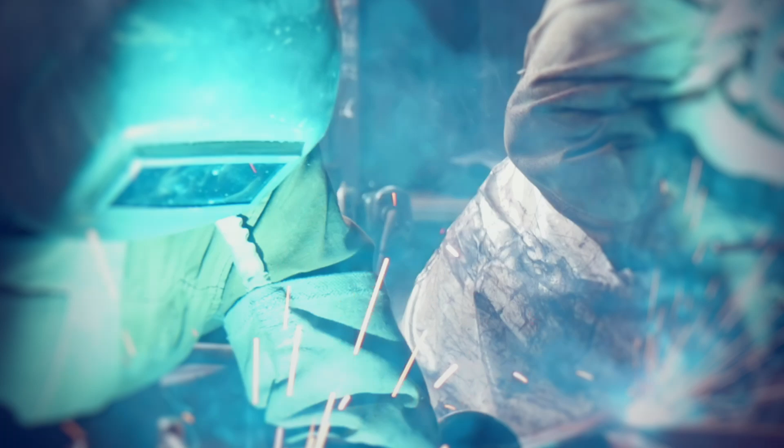Welcome to Trading Up Special Edition, where we give you an inside look at job opportunities and the possibility to trade up your lifestyle. Probably one of the toughest decisions we make is what career path to follow, whether fresh out of high school or already in a career that isn't quite what you expected, or perhaps facing a job loss. What are your options?

You could just immediately enter the workforce. Many today are hiring with no experience necessary. Maybe a 4 or more year college degree is your path to a chosen profession.

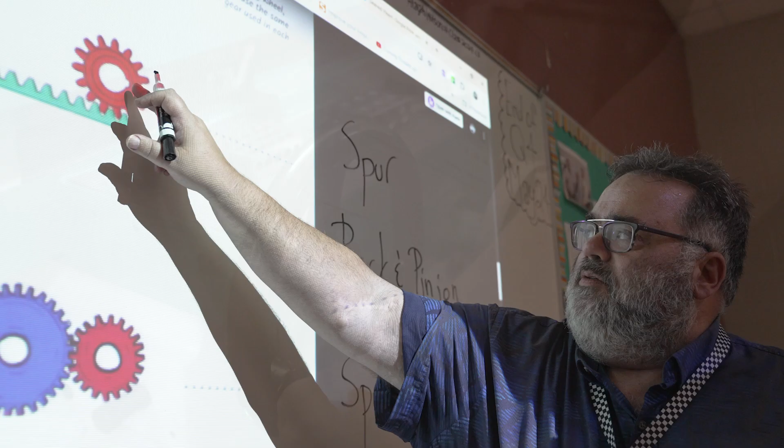Or yet, another option is to get trained by and learn from the best at Toledo Public Schools Career Tech, a place where you can unlock your future. You won't just settle for an average run-of-the-mill job. You'll be preparing for a great and rewarding career.

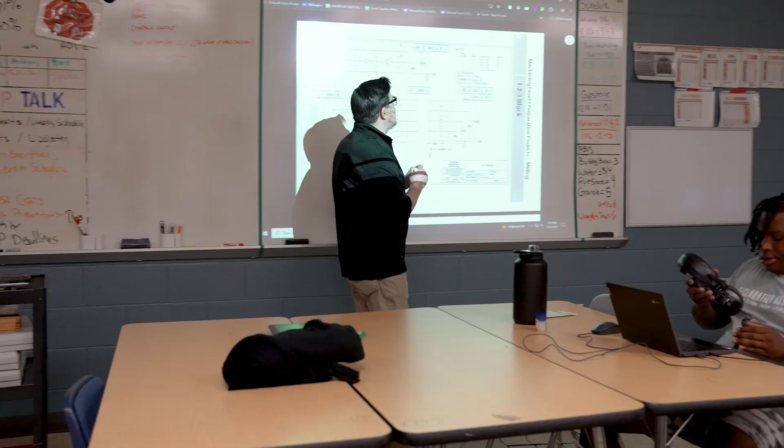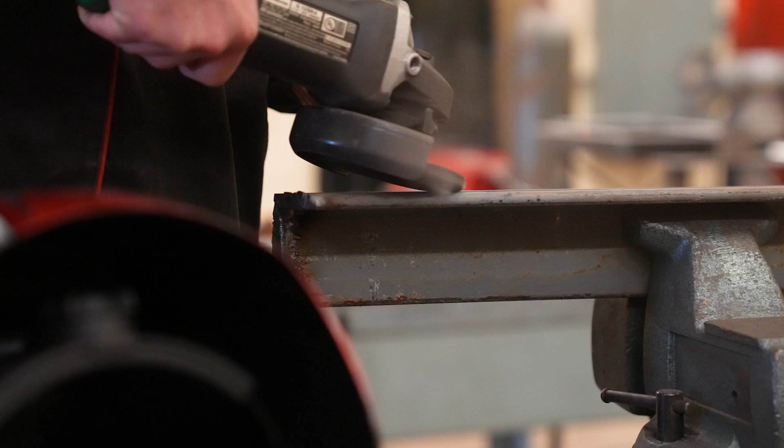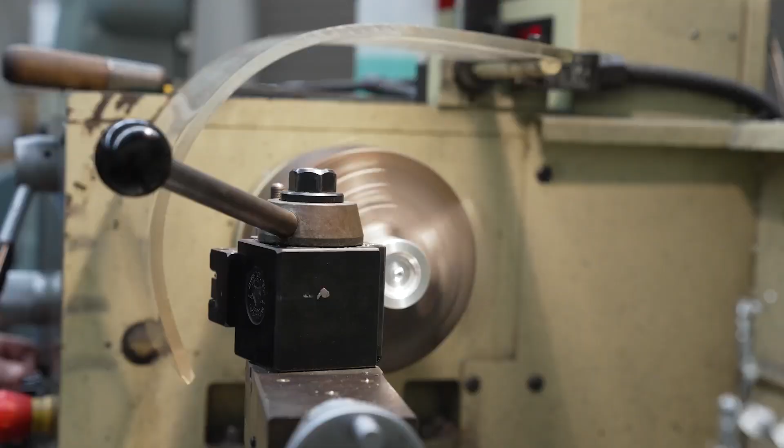Fantastic instructors provide both expert instruction in the classroom and comprehensive hands-on activities in the shop, training you for your career of choice. On this episode of Trading Up Special Edition, we're heading to Toledo Public Schools Career Tech to learn more about the classes in their manufacturing program. We'll meet several instructors and students at Toledo Public Schools to hear their opinions on the program and what opportunities those classes provide. Offering both advanced manufacturing at multiple locations and welding, Toledo Public Schools has a career path for you.

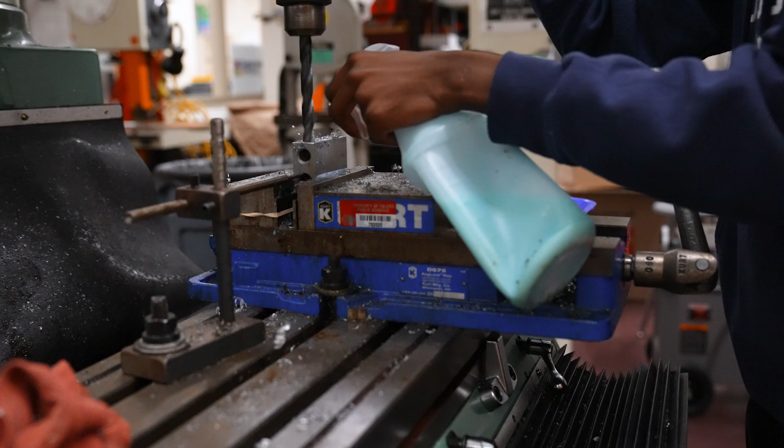My name is David Dowling. I am the Career Tech instructor here at Jesup Wakeman Scott High School. So a student enrolled in Scott's Advanced Manufacturing and Machining program has the opportunity to participate in several different areas. They can get a lot of different industry recognized credentials, including their OSHA 10, their NIMS measurement materials and safety, and here recently we've added the Universal Robots Core Training credential to that list.

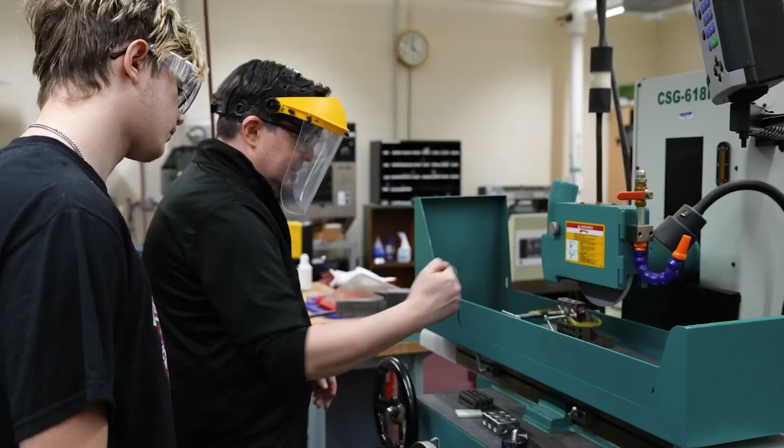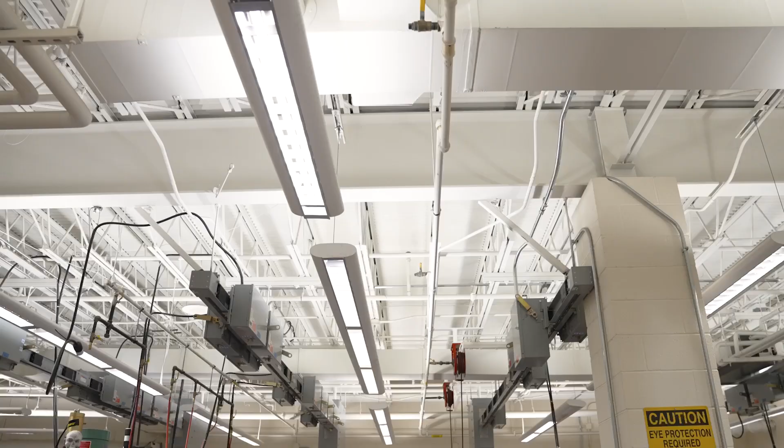Additionally, students have the benefit of being able to enroll in our College Credit Plus program through our partnership with Owens. So the student enrolled in this program gets to practice hands-on in the machine trades industry, but they also get preparation and knowledge toward all types of skilled trades in the forms of measurement, materials and safety-related practice and certification. We are a machine shop at our core, so they get to learn basic machining principles, operation of manual turning machines and lathes, and operation of manual milling machines.

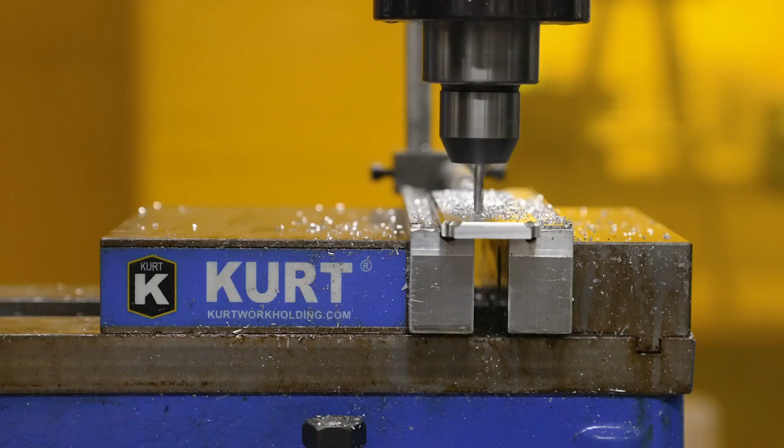My name is Duran Jackson. I attend Scott High School, and I'm in Mr. Dowling's class, Advanced Manufacturing. A typical class day for me is usually being in the classroom, working on assignments on my computer, but about 30% of our work comes from in the lab - milling, lathe work, sawing, and stuff like that.

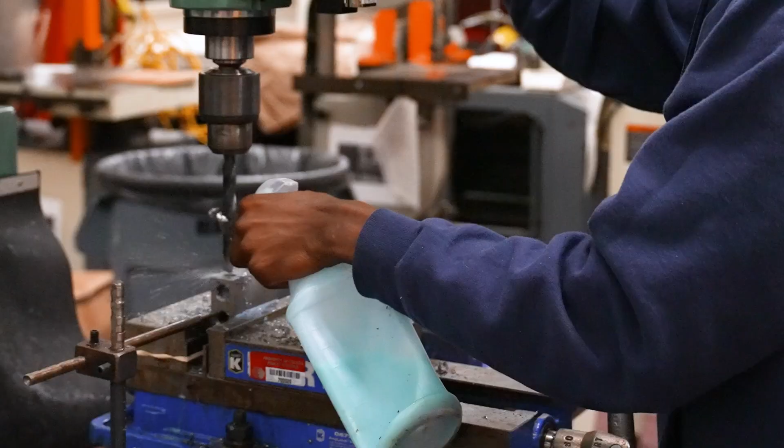This is a CNC vertical mill, and I was doing a 3-hole block project - you basically just program it to go to every spot you need to create a new hole. We start off tapping, we have our middle touches, then we have our finishing touches. And they do get to start the introductory level of programming of CNC equipment like our Haas milling machine here.

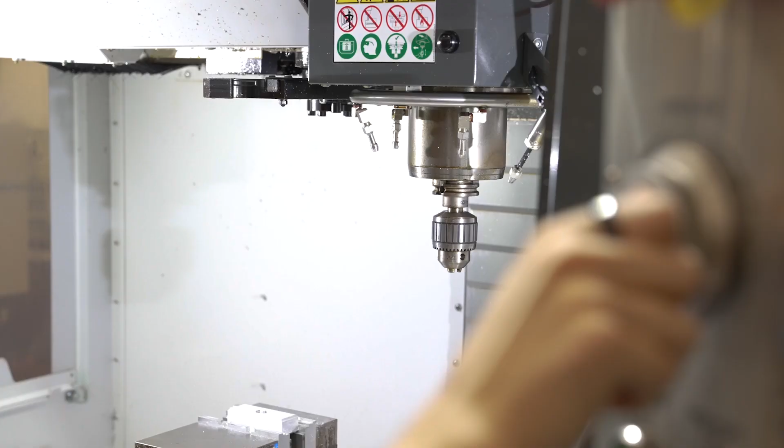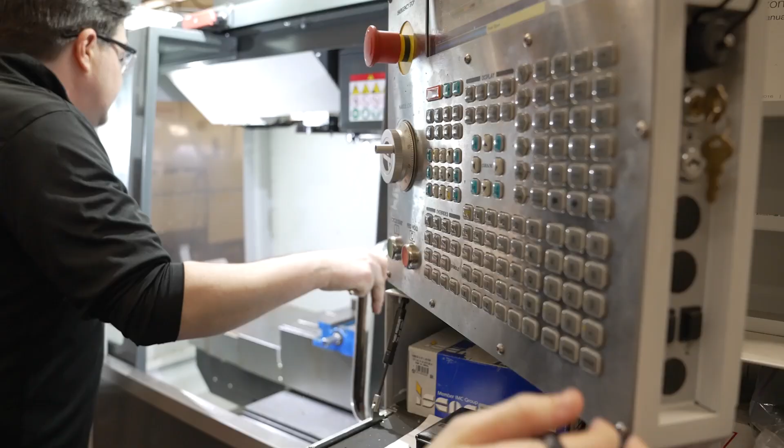So students get introductory skills in the CNC machining and programming fields. Now there's a shortcut button for sweeping the hole. We also have ProtoTRAK CNC here in the lab, and students get to practice on both of those types of equipment. Students get the opportunity to participate in different activities related to those.

They make a wide variety of projects on those machines. Kids like to make a nameplate for either their office or their parents' office. A lot of times kids will do it for Mother's Day or Father's Day.

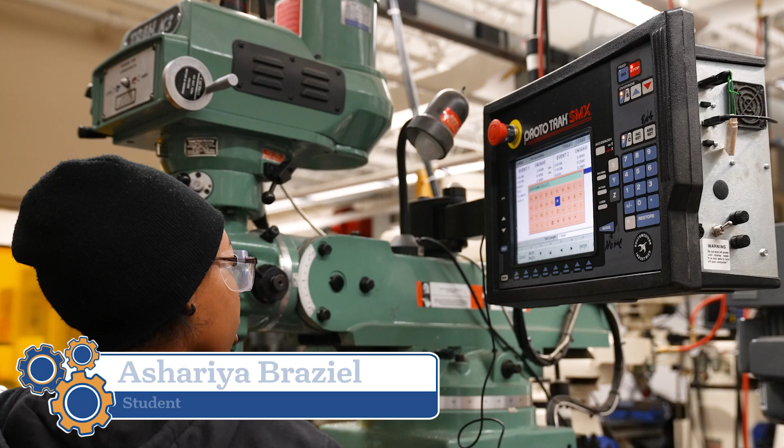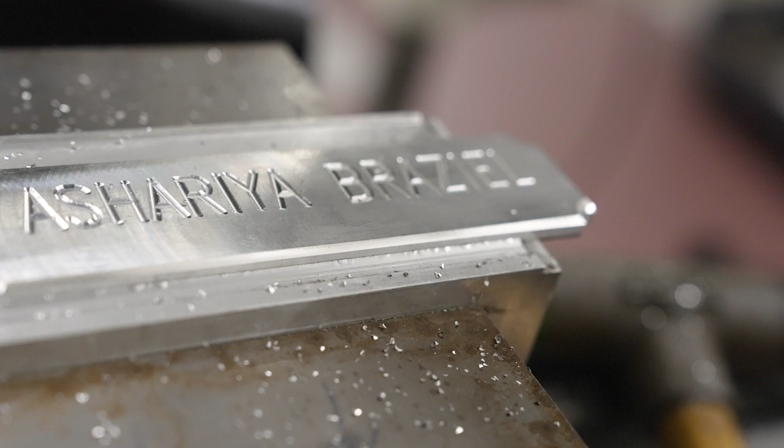My name is Ashariya Braziel. We're at Scott High School. I was engraving a nameplate. I basically put in a program, put in your X and your Ys, and then you start engraving it. Once it's all finished, it'll look really good. And then that comes with a nice 3D printed desk stand, so it sits right there on the desk for anybody to use.

I think about our class of 24 right now, and we have one student, Mr. Duran Jackson. He's going to be enrolled in Lincoln Technical College next year, so he's going right into a CNC machining career pathway. With the skill that I'm going with, I can go get different jobs throughout the country - milling, lathe, sawing, stuff like that.

The start-off pay is probably pretty good. I looked into it, it's nothing less than, I want to say, 21 an hour. I'm pretty sure that's just start-off pay. We have Mr. Tim Rickenberg.

He's actually going to join the United States Marine Corps, so he wants to do military service. When I graduate high school, I'm going to go into either operating engineering or pipe fitting.

We try to help our students not just in machining program pathways, but also in other skilled trades program pathways if that's something they're interested in.

One thing in the future I will say is I would be a teacher. It's like I'm giving back to people who were in the same position as me, or people who are looking to be in the same position.

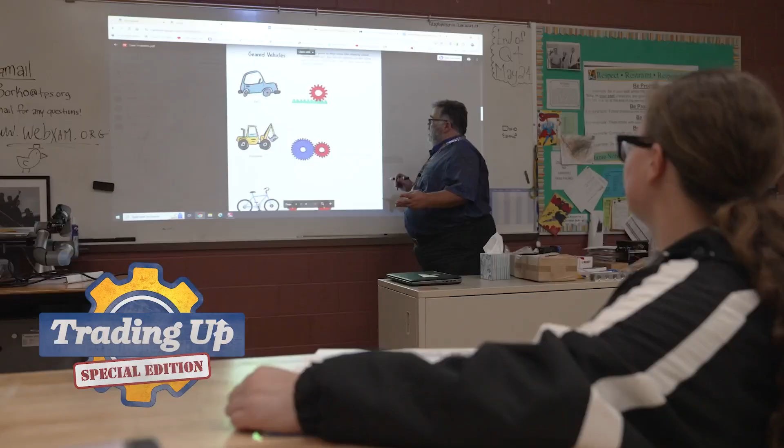Coming up on Trading Up Special Edition, we'll head to Toledo Public Schools' Start High School to hear more about the advanced manufacturing class offered there and see what that location's class provides. More hands-on learning awaits. We'll be back right after this.

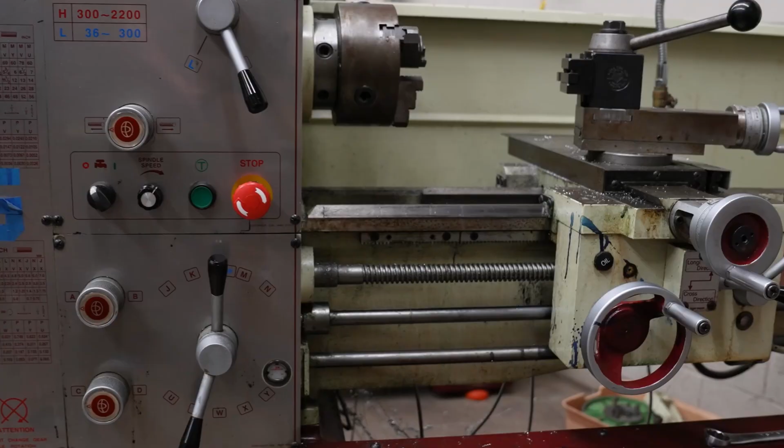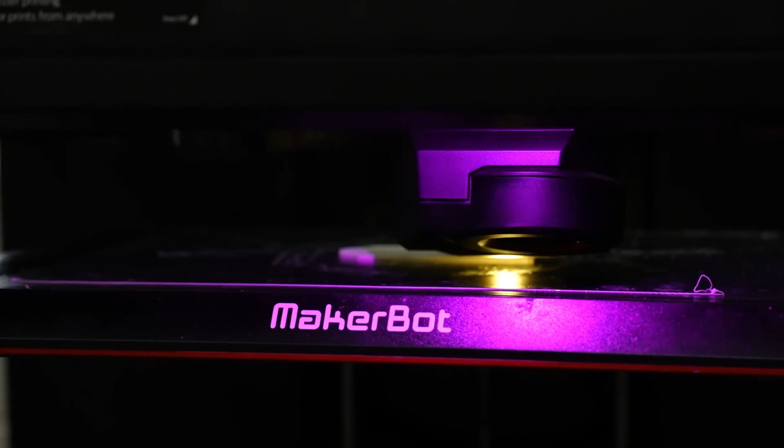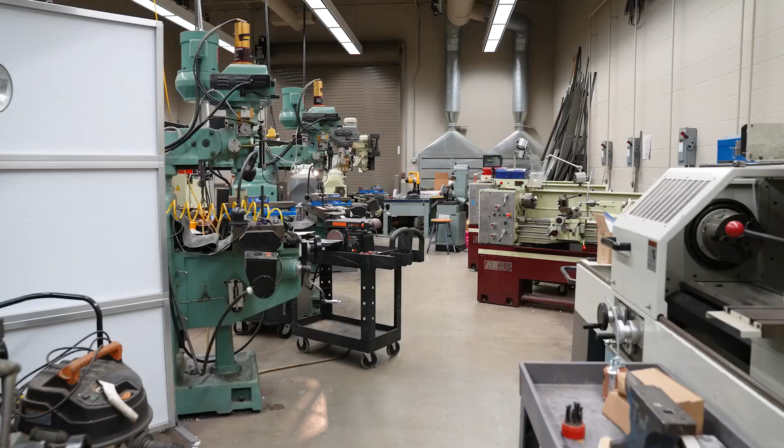In this segment, we're visiting the Advanced Manufacturing class at Start High School. Hi, I'm Carl Borko. This is the Advanced Manufacturing program here at Start High School. This program is based primarily on metal machining work, where not only do we teach the kids how to do things on manual machines like manual milling machines, manual lathes, and drill presses, but they also learn how to program parts in computer numerically controlled machinery. They also learn to draw parts in something called Mastercam. CAM stands for Computer Aided Manufacturing.

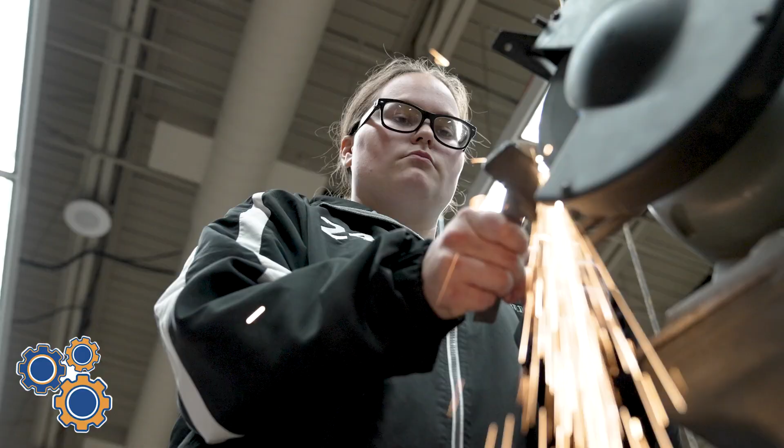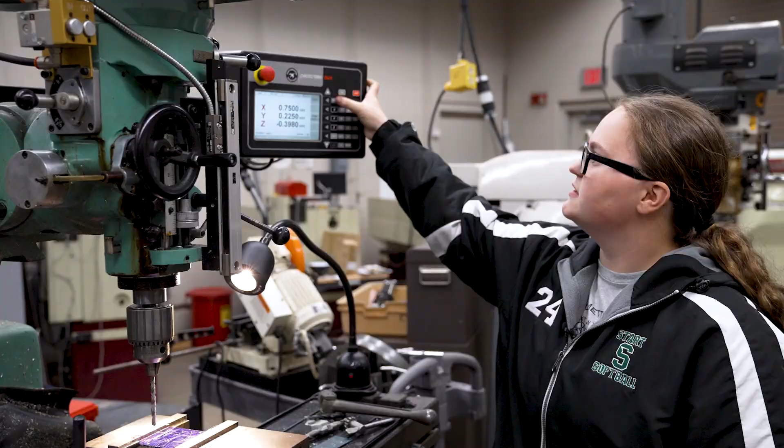I'm Alexa Noel. This is Advanced Manufacturing at Start High School. A typical day here is we're either in the lab starting to make our parts and going through that, or we're in the classroom working on programs for our parts. This machine behind me, we're able to put in coordinates and have exact measurements and cutouts for metal pieces to make whatever you desire.

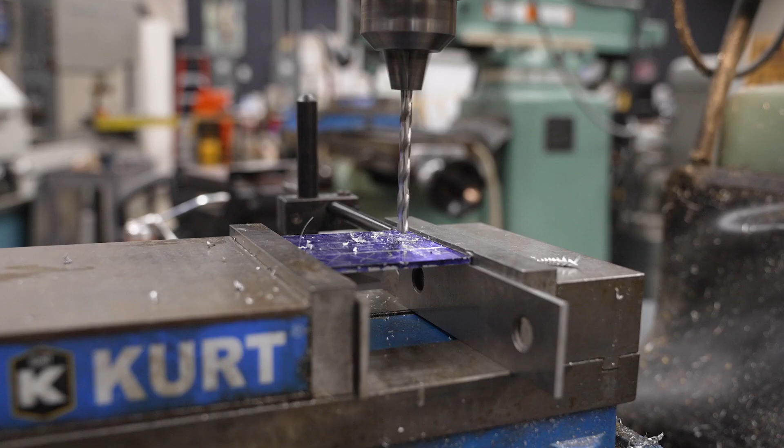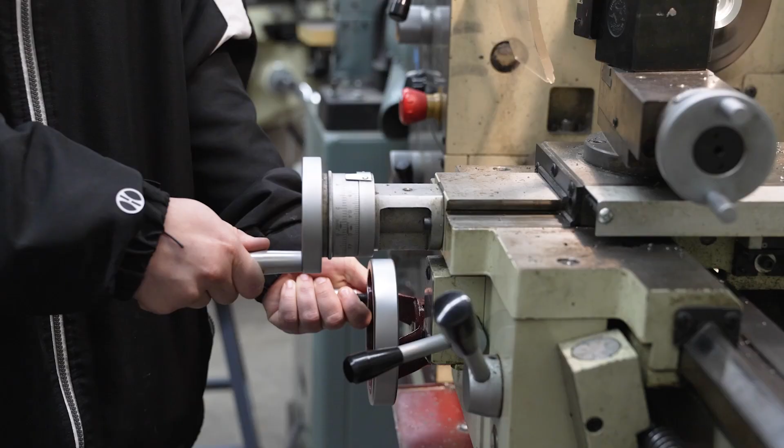This machine here, I have programmed exact coordinates for this plate, and this will just go straight to where I need it to cut holes. Then over here we have the lathe. We use this machine — you can do almost anything from jewelry to tools. We can use this to thread materials, cut them for anything we may need.

The ideal candidate should have some kind of decent background in mathematics, geometry, and trigonometry. The other skills that they would need is a good work ethic, and they need to be on time every single day. I feel hands-on is pretty important.

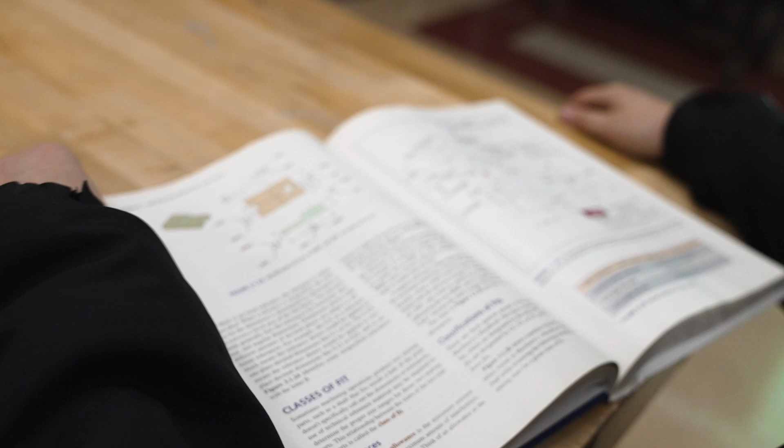Definitely for me, it's something that I can come to this class after sitting at a desk and work with materials instead of just doing pen to paper. It's different than your average class experience. All we're trying to do is instill in them the needs of industry and any jobs in the marketplace for that matter.

With this class, you get many opportunities into internships. Every internship that we send our students out into is a paid internship, averaging about $13 to $14 an hour. What's important is they get out there and mingle with the people doing this kind of work every day, so it's important that they do their internships. If they're lucky, the place they intern at will offer them a job straight away, and even help pay for their college tuition if they so desire.

The myth of having to graduate high school and go straight to college is just that now, a myth. If you pay attention to the Dirty Jobs program, you'll find out the average age of anybody in industrial manufacturing right now is 58 years old. So we need younger people to get more involved in what we're doing here.

The pay rate is incredible. Straight out of high school, you can get a nice starting pay around $15 an hour, and that's just your baseline. The longer you do it, the more you learn, and the more you're able to get. Just walking in the door and pushing buttons on a machine like this one, without even knowing how it works, that's about $17, $18 an hour in a lot of facilities. If you know how the machine works and can program it, now you're looking at about $25 to $30 an hour, and it just gets better after that.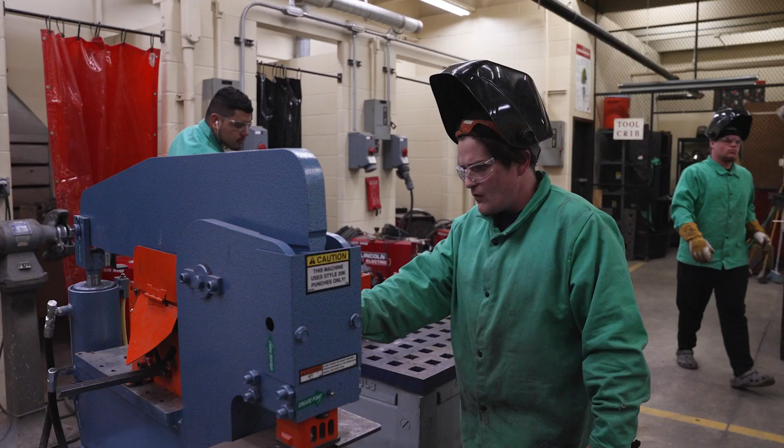Welcome back. Toledo Public Schools Career Tech gets fiery. In this segment, we're visiting the welding class held at Waite High School. Let's head to the shop and see what career paths this class provides.

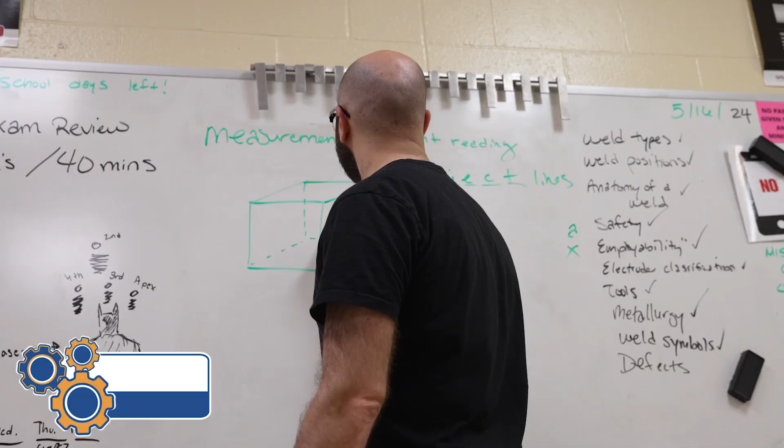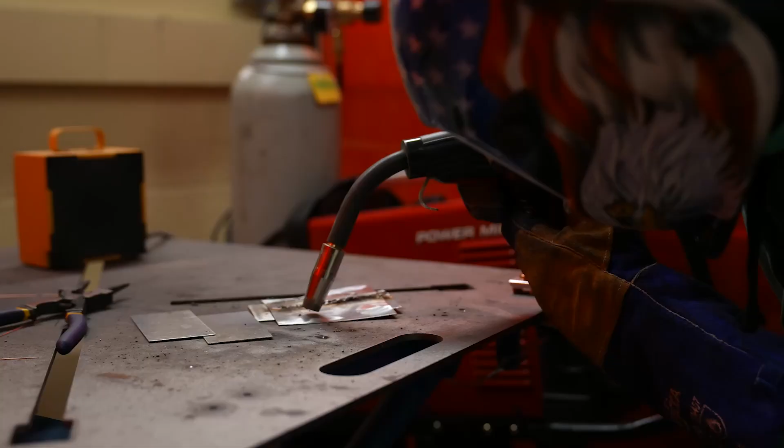My name is Zachary Kowicki. This is Waite High School, and this is the welding program for Career Technologies. We start sophomore year learning about metallurgy, measurements, safety, things like that. Then we move into our junior and senior classes, where every semester we focus on a particular welding process. We start with MIG welding (GMAW), then move into stick welding (SMAW), flux core (FCAW), and then TIG welding (GTAW) at the beginning of their senior year.

A typical day for students depends on their grade level; they have a 1, 2, or 3 hour block class. Sophomores come in and we usually try to do a couple of days of classroom work and a couple of days of lab work every week. The juniors and seniors get classroom and lab work every single day.

My name's Clayton Haney. We're at the welding program at Waite High School. The program in general is great. I've been here since the beginning of the year, and I intend to do it next year for my senior year. We're in the classroom for about 15, 20 minutes where he goes over what we do for the day, and then we come down to the booth for the remaining 2 hours.

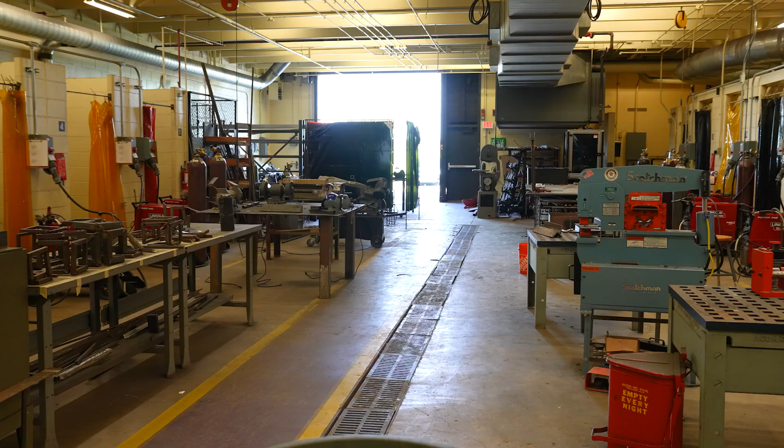PPE, he goes over that every day. That's personal protective equipment—we're wearing gloves, these jackets, our safety glasses, our welding hoods, just anything that protects us from the sparks and heat from the weld. A welding hood has a shade from 9 to 13. You change the shade depending on how strong or weak your eyes are, and that prevents the arc, which is the flash from the weld.

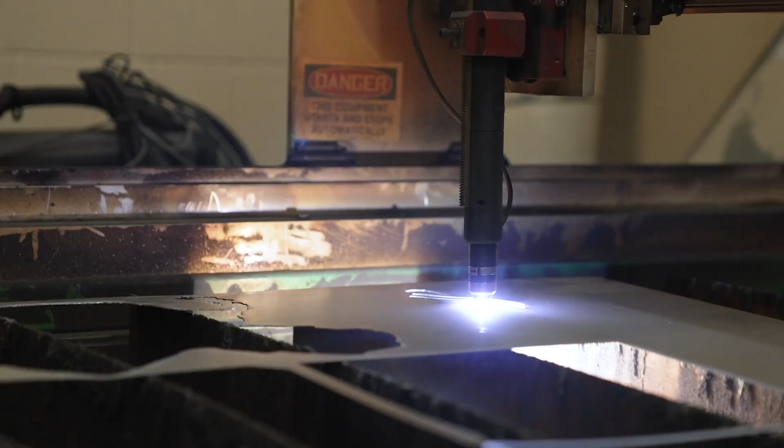Every single class, I try to get them started on projects as soon as possible. Today, I cut a background piece for the sign I'm making for my mom. I used the CNC plasma cutter to cut them both out, and then I just finished painting them.

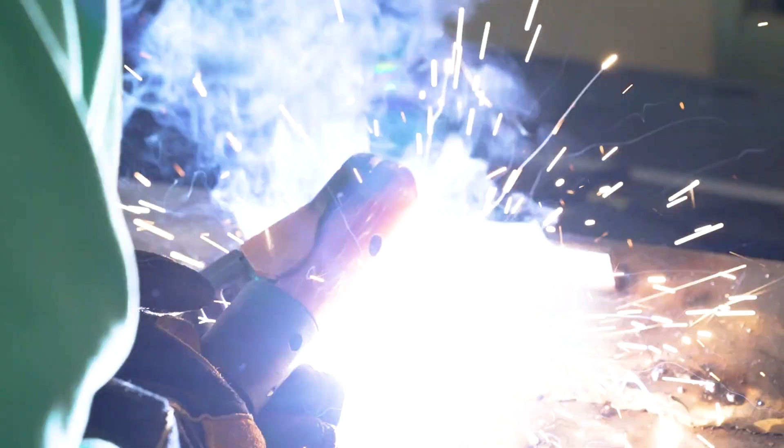My name is Jeremy Jersky. I'm here at Waite High School with the welding program. Right now, I just finished my project, so I'm just welding, laying down beads. I think my skill's pretty good right now, but I'm just practicing getting it down, making sure the welds are straight and sufficient.

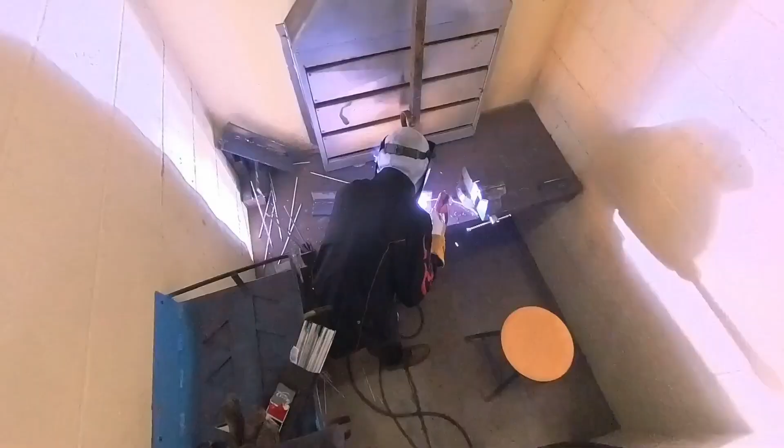The ideal candidate for this program is somebody that does not mind sparks, playing with fire, doesn't mind getting dirty, and has a good work ethic that shows up every single day on time.

Mr. K, he's a phenomenal teacher. Meeting him at the beginning of the year was great. He's well instructed, he knows what he's doing, so he helps out a lot.

Two years ago, I had a student who was in a relatively rough spot. She graduated, took this class to heart, and now she's out in the field working as a TIG welder, making $22 an hour. She's doing really well from where she came from. But that's the kind of students we're looking for in this class—the ones who've seen some stuff and know that this is a vehicle they can use to improve their life over the rest of their life.

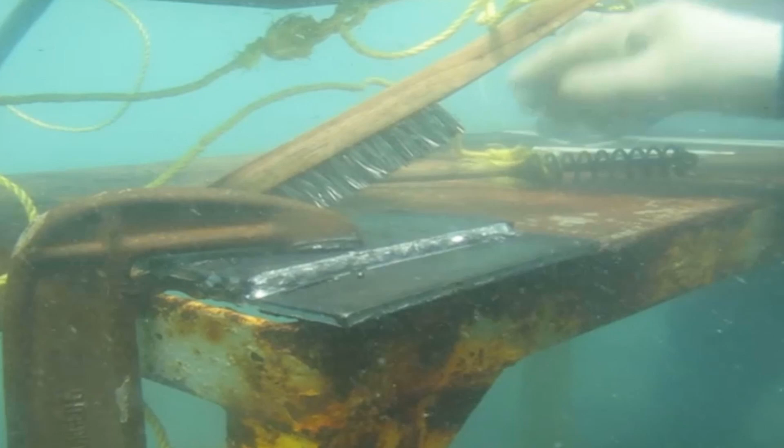My future plans are to come back next year for senior year, get the certifications I need, and hopefully this summer get my scuba certs, because I'm hoping to do underwater welding. Underwater welding is one of the dangerous jobs right now going on. There's a lot of pay for that—you're on an oil rig or whatever for a couple months, and it's tax-free.

When you graduate from the welding program, you have an intrinsic skill that will last you the rest of your life. You have the ability to join any of the local unions or any private industry, and translate those skills into an incredibly lucrative career. Again, it's not just a job, it's a career that will last you the rest of your life.

Right now I'm playing football. I'm hoping that goes well for me, but if not, this is definitely a great backup.

Welding is like riding a bike—you'll never forget the process, even if you don't use it for a couple of years. You might be able to pick it up 2, 3, 4, 5 years later and still understand all the stuff you learned while in this class. If so, I'd like to go weld in North Dakota or somewhere like that.

That'd be really nice. I would like it because you got to think, say you're welding up there, you can look at the water, look at whatever's around. It's just a nice landscape, you know. Great paying, good benefits, awesome retirements are out there and waiting.

There are at least a dozen different organizations in and around Northwest Ohio that are begging welders, fabricators, and machinists to come out and actually work for them and pay them very handsomely to do so. For anyone that is interested in taking a look at the welding class.

There's a lot of things in life you can do, like underwater welding, local 33, local 50, there's no border really, there's a lot you can do. And you definitely make a lot of money. Definitely give it a shot. Even if you're not willing to weld in the future, it gives you another opportunity to take on in life. You have something under your belt that you know how to do.